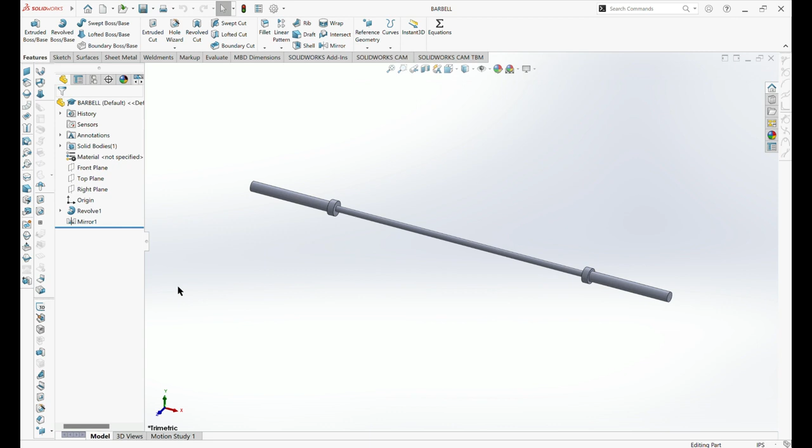All right, first thing I've opened up my barbell part. This is not the assembly, just straight back to the original barbell that we made. I'm going to select the mirror feature and delete it. This way we're only working on half of the barbell at a time. When we get to the end, we'll re-mirror it and everything we've done over here will end up on the other side. Kind of cuts our workload in half for us.

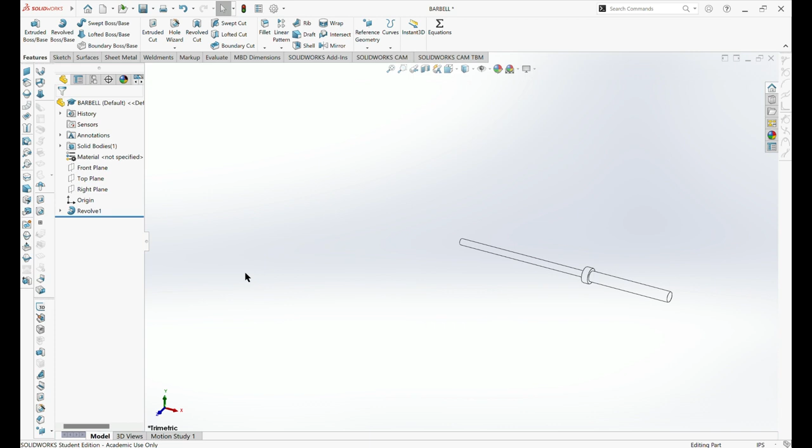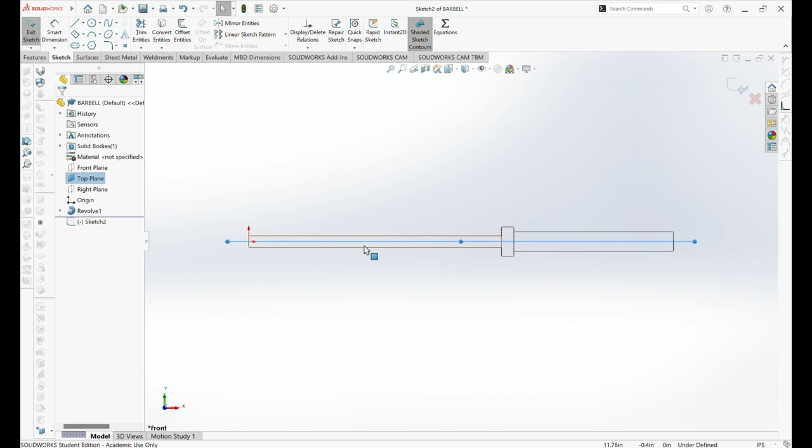Nice little trick. Next I'm going to change my view. All I want are the lines. This way the knurling will stand out a little bit better for me. I'm going to start a sketch on my front plane. There we go. And I'm going to have it show the top plane. This gives me a nice line straight down the center that I can use to reference. In this first sketch, I'm going to draw a line on this plane until I'm in contact with it. Nice, straight, flat, horizontal line.

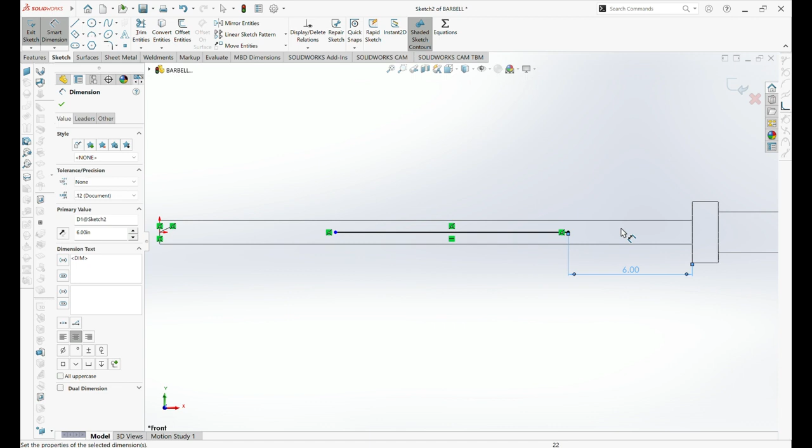Grab my dimensioning tool, and I can hide this top plane, if it'll let me. There we go. Now it's not in the way anymore. I want to put a dimension from the edge of this line I just drew over to the edge of my barbell, and I'm going to make that about 6 inches because we really aren't going to grab the bar way out here at the end. The line itself I'm going to dimension at 12 inches. There's my first sketch. Just a simple line in the center of the barbell, 12 inches long with a 6-inch gap.

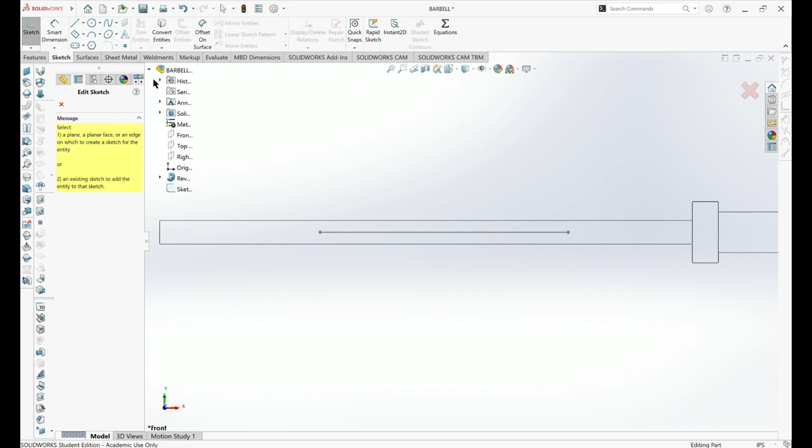Going to click in space. See how the line went from blue to gray? That means I clicked in space. Now I'm going to start another sketch, again on the front plane, right here above this point. I'm going to zoom in pretty close, go up into my rectangle tools, and grab my 3-point center rectangle. Going to start this on the top line, come out at an angle, and see how this gives me a nice angled rectangle.

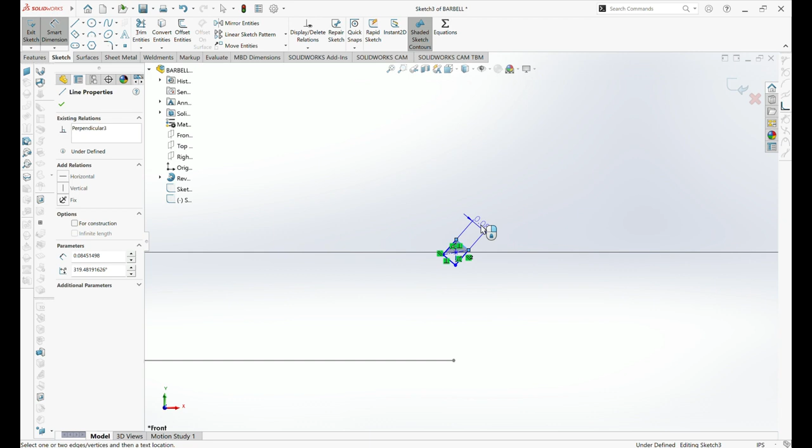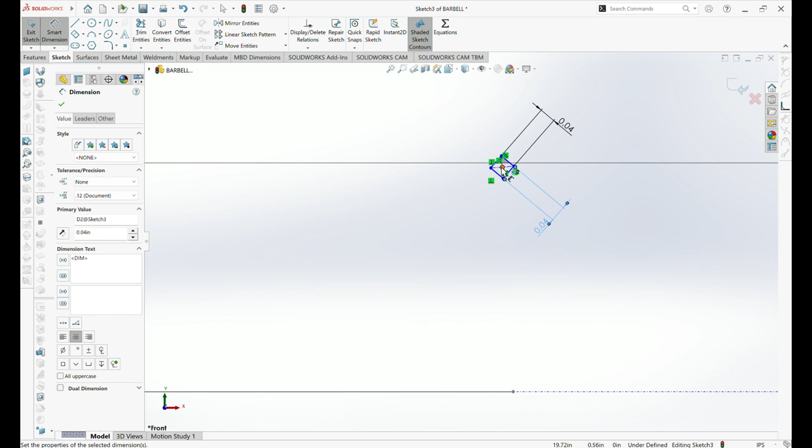Going to add some dimensions to this guy. This is going to be tiny: 0.04. And same thing on the other surface, 0.04. Good. Now the distance from the center down to this point: the original diameter of our barbell was 29 millimeters, so the radius is 29 over 2. That kicks it right out there, even with that line for us.

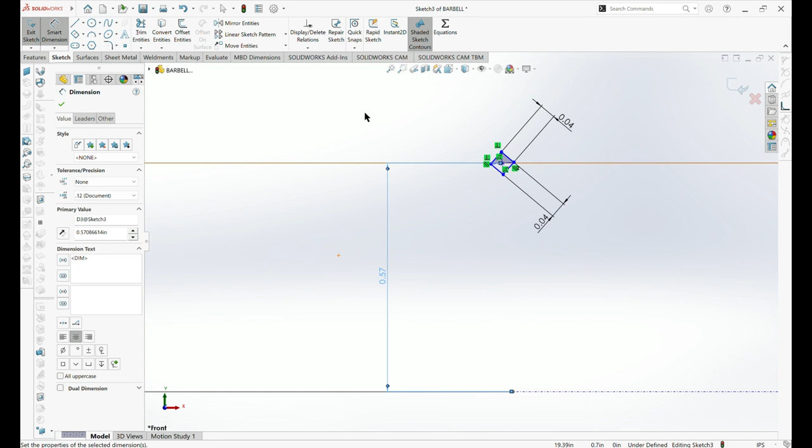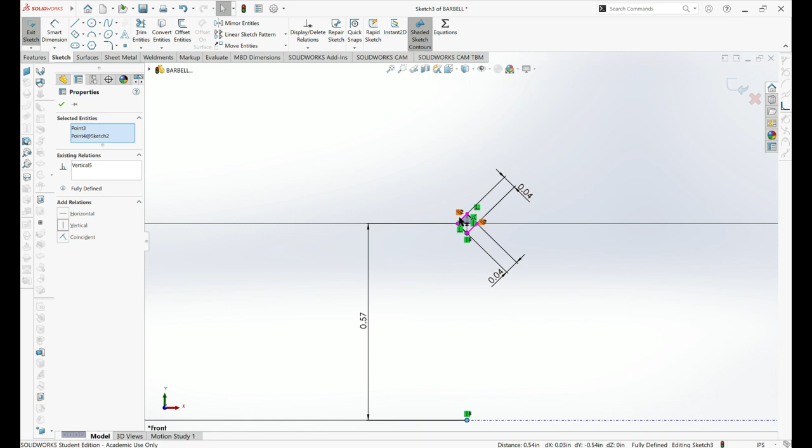Get out of my dimension tool, go into my selection tool, pick this center line, say I want it vertical. Now I can pick this little point on the bottom, hold Control, pick the point on my first sketch and say I want those vertical. Lines it all up nice for me. So I've got a little tiny square tilted at a 45-degree angle, and that's going to be my cut pattern. I'm going to be cutting this little V of metal out, and that's what's going to give me my knurl. I can exit this sketch and click in space. See how it went from blue to gray.

I'm going to open another sketch, again on the front plane. Zoom on in, and I'm going to need one of these on the bottom as well. To do that, I'm going to say Convert Entities and select Chain. This allows me to only click one of these surfaces, and it grabs the whole thing. Say, yep, I want that on my fresh new sketch. Now I'm going to mirror it. Entities to mirror, I'll just click and drag over it. See how it selected all those lines?

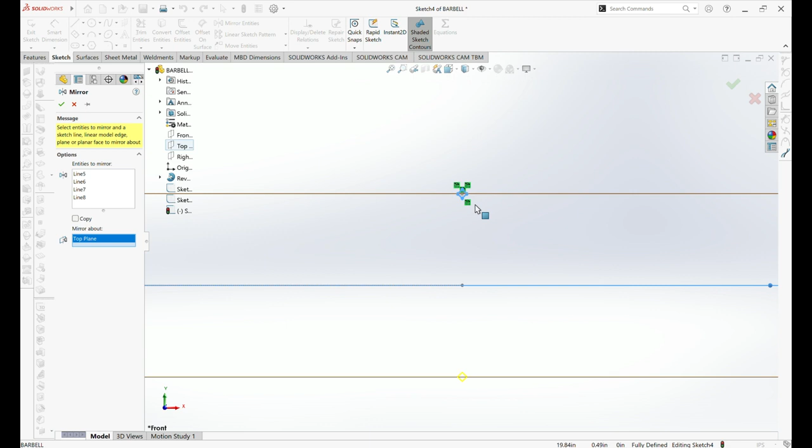Mirror about: it won't let me pick that line, so I can say my top plane. I'll mirror it about my top plane, and I do not want a copy of it. All I want to do is take this and put it down here. I don't want one on top and bottom, so do not select copy. Say OK, and see, it moved it down there. If I hide my other two sketches, you'll see now I just have this guy down here, and that's perfect. So I've created 3 separate sketches.

So now I'm going to turn these sketches into actual cuts. I'll hide that guy as well. Perfect. To turn him into a cut, I'm going to go up into my features menu. I'm going to say swept cut. This is kind of similar to the way that we wound the spring for our Olympic barbell clamp.

So the profile of the cut, I can grab that top little tiny square that I made, sketch, and that's the profile. Now the line that it's going to follow is going to be that original line right down my top plane. Go into my options. I'll say keep normal constant. That'll keep my radius. Profile twist, I want to be able to specify. This time I'm going to specify it in revolutions, and I want it to go around 3 times.

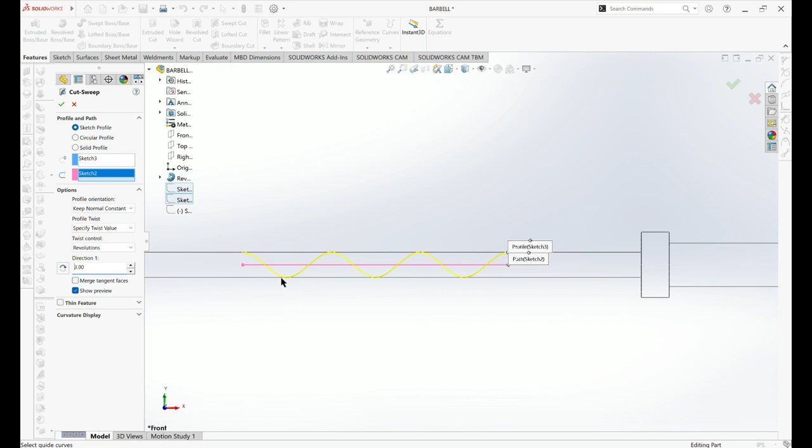And there we go. So see, we defined a 1-foot path, and it's gone around 3 times in that 1-foot path. That looks pretty good. But this isn't enough to really give a knurling pattern. So I'm going to come up here in my linear pattern. There's a little drop down below it. One of the options is circular pattern.

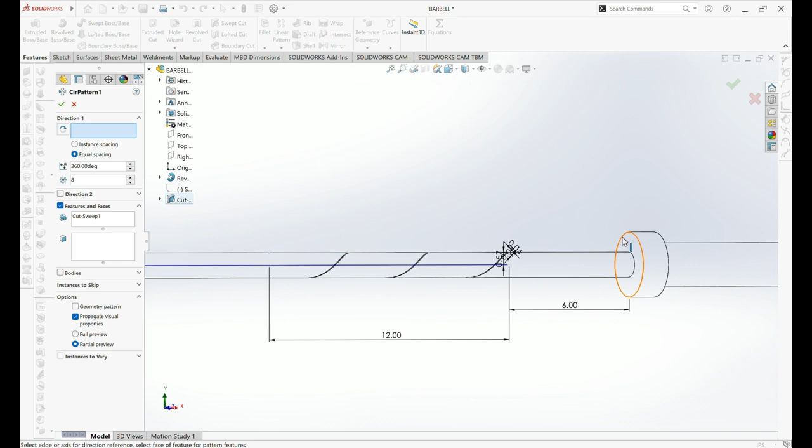So what direction do I want to circle? Well, pick this circle here and say you want to go around 8 times in 360 degrees. And the feature is that swept cut. Say OK. And there we go. Now that's starting to look like something.

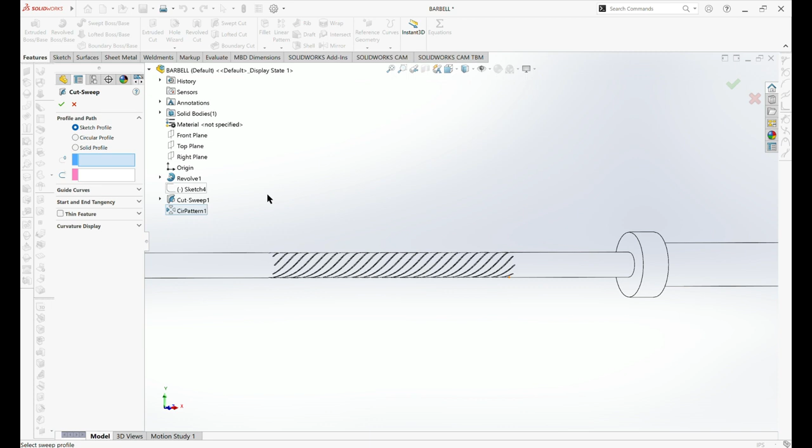So now we have to add our swept cut off of that bottom little notch, and then we will pattern it as well. So our next step is to do another swept cut. This time we are going to grab the sketch of our little cutout on the bottom. And for our center line, it is currently hiding in that first swept cut we made, the sketch of the straight line. There we go. And we'll basically just reuse that same line in each of these swept cuts.

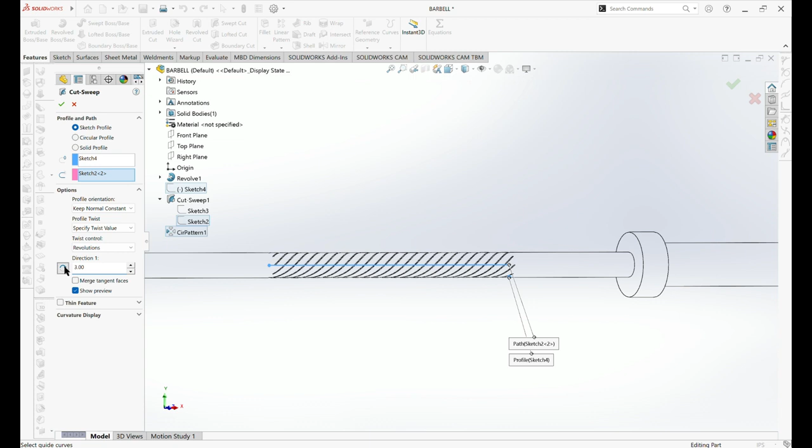Go into our options. We'll say keep normal constant. Specifying our twist value, specifying it in revolutions. Exact same thing. We're going to go around 3 times, but this time we're going to flip the direction with this little flip option. Say OK. And there we go. See how that's crisscrossing against the swept cuts that we just made.

So now I just have to pattern those around. So up under linear pattern, select your circular option. And once again, for the direction up here, we're just going to pick a circle. And in 360 degrees, we want this to repeat 8 times. What's repeating? Well, it's our cut sweep number 2. Looks good.

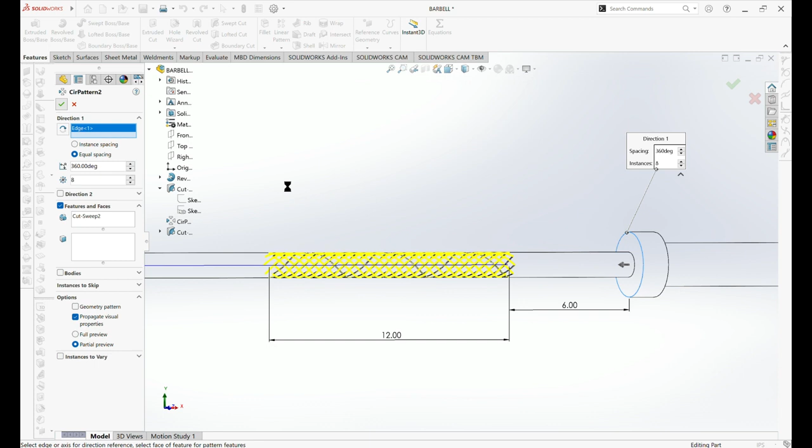And if you're thinking, well, why didn't you just do all of these together and circular pattern both of the cut sweeps? As you can see, it's taking my computer a minute to process this. And I found that my computer bogged down if I tried to throw too much at it at once. So by taking smaller bites, I could still manage to muddle my way through it. If you have a more powerful computer, hey, go for it. So this might take a minute for it to process. All right, there we go. And now we've got a nice knurled pattern here.

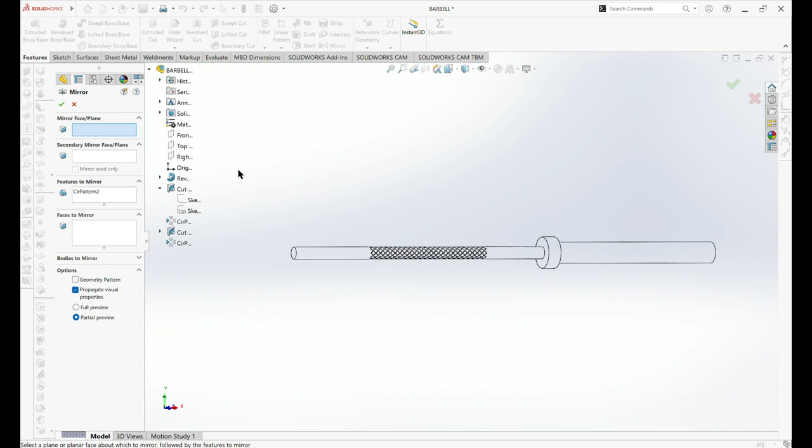We'll zoom back. All we got to do is re-mirror our entire bar. So up into the mirror option. We can get that to open up. Oh, looks like my computer is still... there we go, it's catching up. Like I said, this little computer I'm working on kind of struggles with this knurling. There's a lot of math going on in there. So the face or plane that we're going to mirror about is our right plane.

There we go. And our features to mirror is going to be all the features of this object. So we have our revolve, we have our cut sweep 1, our circular pattern 1, our cut sweep 2, and our circular pattern 2. Take a second here for my little processor to catch up. There we go. Looks like we're caught up. So green tick mark. And we'll give it a minute to process.

As we can see, it's thinking. Crossing my fingers. Hopefully it comes out good.

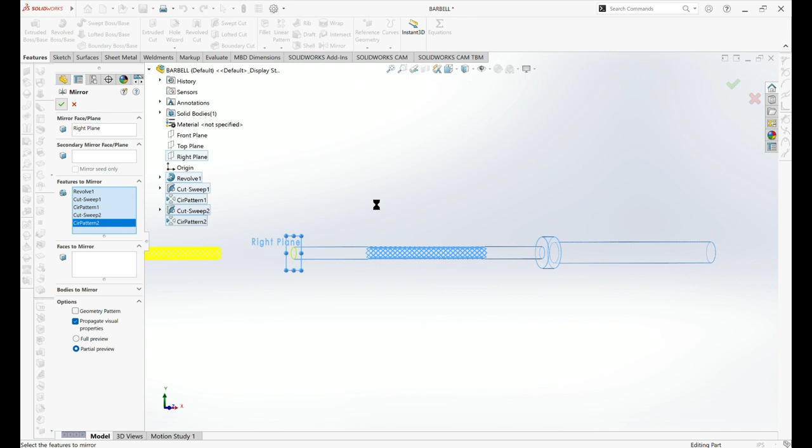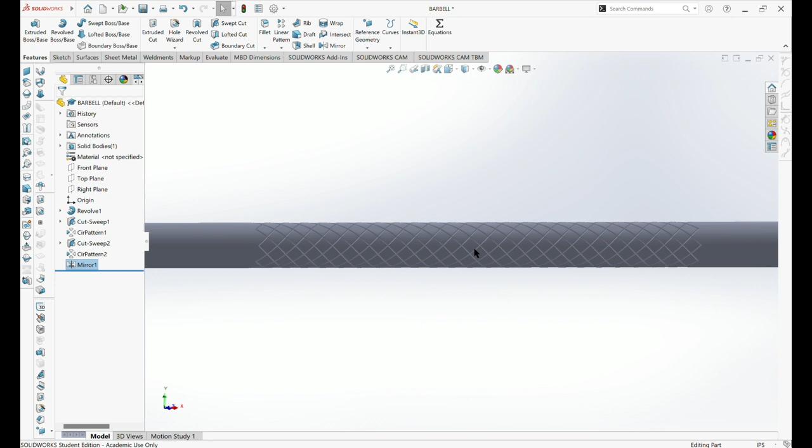All right, there we go. We've got ourselves a barbell with some nice knurling on the grip. And I hope you enjoyed this build. Here, we'll put some color back on it. And if you zoom in, there it is. Now we won't slip off when we're lifting our weights.